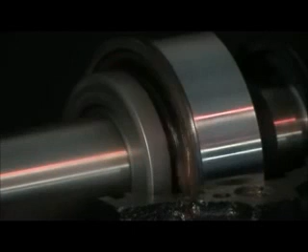Incorrect lubrication is the biggest cause of bearing failure. Inadequate lubrication, degraded grease, and incorrect grease account for 36% of all bearing failures. All-purpose greases are not up to specialized bearing needs and will do more harm than good. Because bearings have a wide variety of operating conditions, the grease needs to be precisely matched to the application. Selecting the correct grease is determined by the bearing type, size, temperature, speed, and load.

SKF regards grease as a fundamental component of the bearing arrangement, as important as the bearing, housing, and sealing. We have specialized in rotating equipment in a wide variety of industries for over 100 years, and our specialized range of lubricants has been developed through this experience. SKF's superior quality lubricants are the result of continuous testing and development.

SKF offers a comprehensive range of lubricants to suit every application, so be sure to select the right grease to prolong your bearing's life. Thanks for watching.

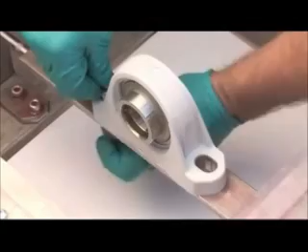SKF Y bearing units have been designed to operate in wet conditions and to resist any problems caused by prolonged washing, even with aggressive agents.

High-pressure wash tests prove their resistance to water ingress. Red dye has been added to make the proof easier to see.

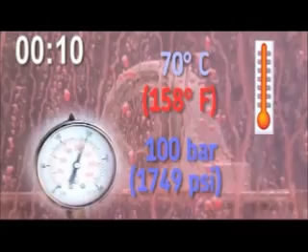High-pressure washing with hot water and caustic agents creates a variety of reliability problems. Lubricants can be washed out, resulting in a need for frequent re-lubrication.

Corrosion can occur in areas with poor chemical resistance, creating flaking and possible contamination. These combined effects result in reduced bearing service life, as well as increased costs for lubrication and maintenance.

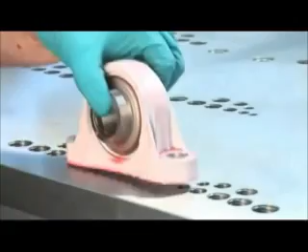When it is dismantled, we can see that no water or detergent entered the bearing and that the seal has not been affected by detergent creep. Thus, the bearing is contamination-free.

This result is due to the seal, which prevents the washing liquid and any process material from entering the bearing, and which prevents the lubricant from leaking out.

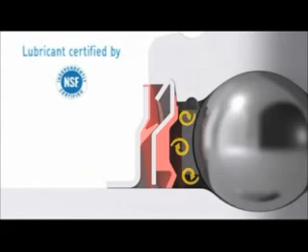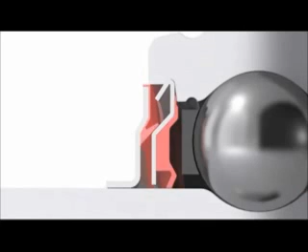Its design includes a special flinger, an interference fit to prevent detergent creep, additional grease fill, and a low-friction multi-lip seal. These features make it possible to have a maintenance-free unit which requires no re-lubrication.

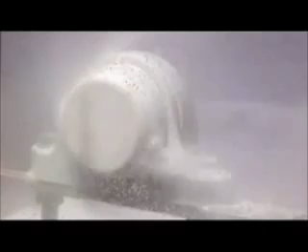In some cases, the health and safety regulations for the food industry require the bearing units to be covered, so workers are protected against personal injuries from exposed rotating shaft ends.

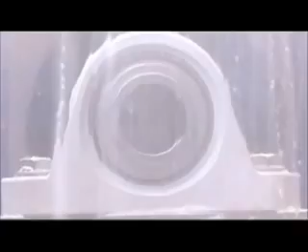The reliable end cover remains in place even during high-pressure washdown.

SKF Food Line Y bearing units are a maintenance-free solution. They are fully sealed, and once installed, the units require no re-lubrication and so eliminate the cause of excessive grease purge and its environmental impact.

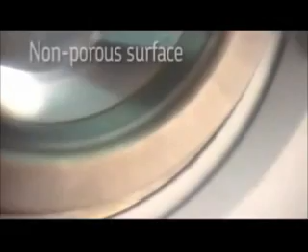Hygienic design features include a solid base that has no cavities for dirt and bacteria to enter, harbour and grow, a light grey colour for easy visual inspection, a non-porous surface that resists accumulation of bacteria, and smooth shapes with deeply radiused corners for easy cleaning.

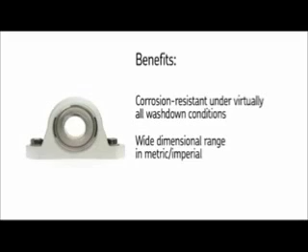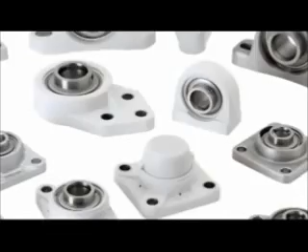How much could you save with SKF Y bearing units? SKF Food Line Y bearing units, the maintenance-free solution.

SKF pioneered the use of induction heating for bearings over 25 years ago. After consulting many users, the current bearing heater range not only has class-leading performance, but is designed ergonomically for ease of use. The standard range consists of 3 heaters, whilst larger heaters are custom-made to suit the application.

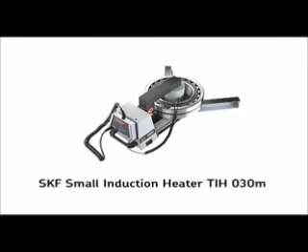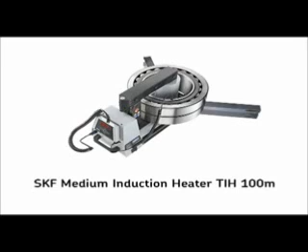The SKF small induction heater, TIH 030M, which can heat a 30 kilogram bearing in 20 minutes. The SKF medium induction heater, TIH100M, which can heat a 100 kilogram bearing in 20 minutes. And the SKF large induction heater, TIH220M, which can heat a 220 kilogram bearing in just 20 minutes.

SKF induction heaters can also be used to heat other workpieces, such as gears or pulleys. For large applications, a range of custom-made heaters is available.

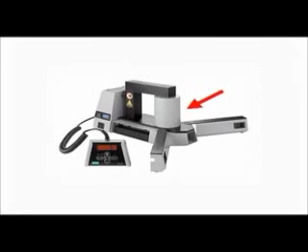Let's look at the SKF heaters in further detail. The coil is on the outside for maximum efficiency. Fold-out legs safely support the bearing. A remote control box is incorporated to enhance user safety. Internal yoke storage is also available. By using the selection chart, it's easy to choose the right heater for your needs.

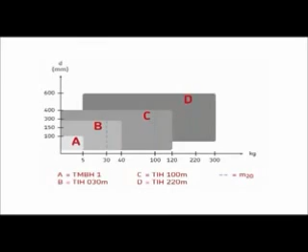Let's follow a technician in his daily work and see how the induction heater helps make mounting bearings easy. To get the best from the SKF bearing heater, always read the instructions for use before use. Pay particular attention to the safety warnings to keep you and others around you safe. Check that the heater is suitable for the supply voltage before use. If okay, then plug the heater in.

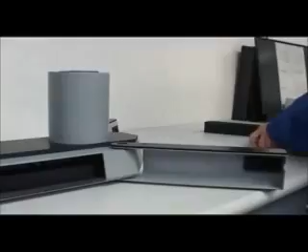First, remove the yoke and fold out the legs. Position the bearing to be heated around the coil. Carefully replace the yoke on the uprights. Finally, attach the temperature probe to the inner ring of the bearing.

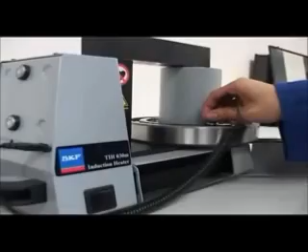For bearings or workpieces that do not fit over the coil, simply position them on the largest yoke possible, making sure that the yoke rests properly on the uprights.

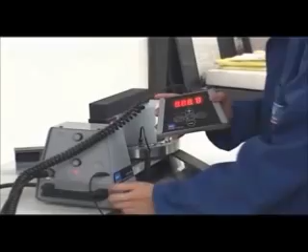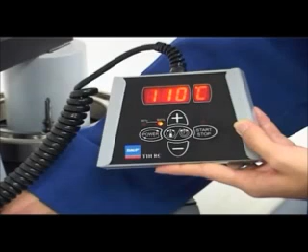Then, remove the remote control from the heater. Switch on the heater and observe the display segment check and warning tone. The default heating temperature is 110 degrees Celsius, but can easily be adjusted by the user. Here, we will use the default temperature of 110 degrees Celsius. Retire a safe distance from the bearing heater, and then press the start button.

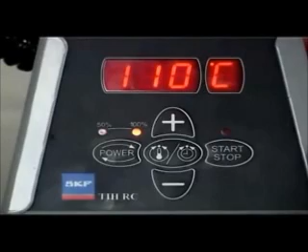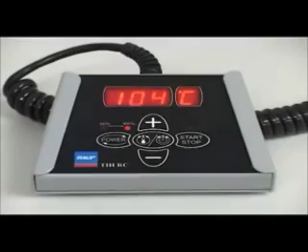The bearing will start to heat up, and the actual temperature can be seen on the remote control. When the bearing inner ring has reached the required temperature, the heater will stop and give a visual indication and warning tone. The bearing is also automatically demagnetized at the end of the heating cycle. If you decide to leave the bearing on the heater, it will automatically start reheating the bearing when the temperature drops by 10 degrees Celsius. The bearing is now heated to the correct temperature and can now be mounted.

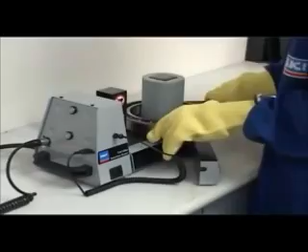First, press the stop button. Using heat-resistant gloves provided with the heater, remove the temperature probe and the yoke. Remove the bearing and place directly on the shaft. The bearing will cool down and a strong interference fit will result.

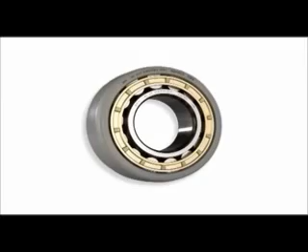SKF induction heaters offer many advanced features and possibilities. SKF heaters are very fast and efficient, but for some bearings, you need to heat them slowly. Bearings with small internal clearances, such as C1 and C2, brass cages, preloaded, or those fitted on the smallest yoke, should be heated slowly. This can be done by simply pressing the power button to select 50% power. As a safety feature, if the temperature probe is not mounted correctly, or if the workpiece temperature does not increase rapidly enough, then an error code is displayed.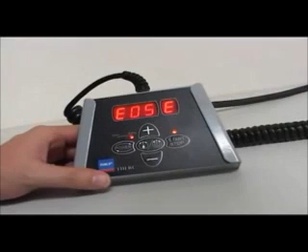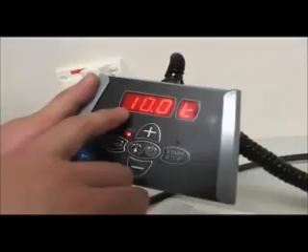For heating large workpieces, such as gear wheels and pulleys, you can choose to set the heater to operate at a predetermined time whilst monitoring the temperature. Before heating, just press the mode button and the mode toggles to time. The required time can then be installed in units of 0.1 of a minute. Then heat the workpiece as usual.

For some markets, Fahrenheit is preferred as a temperature unit. It's easy to display the temperature in degrees Fahrenheit. Simply press mode and up to toggle between Fahrenheit and Celsius.

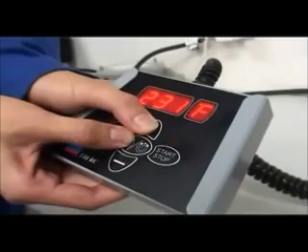You have seen that the SKF range of induction heaters are not only fast, efficient and easy to use, but are designed and built with safety and ruggedness in mind.